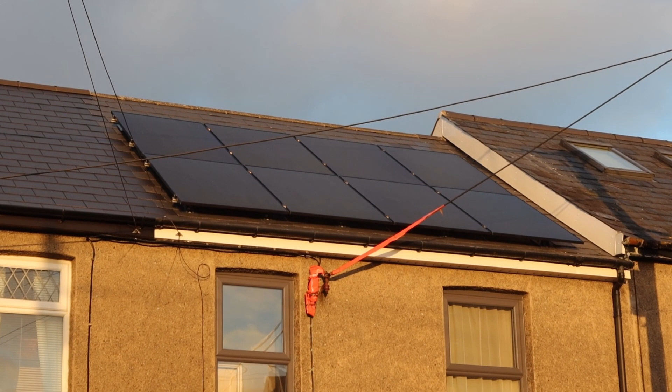So, just thought I'd give you an update on my solar. So this is the outside of my house, of course. I'll zoom in on the panels if I can. How do we do this? There we are. Don't know if you can see there. That's 2, 4, 6, that's 8 panels.

So that's giving you, I'll have to work out what kilowatt hours. I think it's about 3 to 4 kilowatts, something like that. But there we are, there's the panels, soaking up the last rays of the sun for the day. What are we today? 30th of January. So I'll show you in a bit the inverter and the battery. Bye for now.

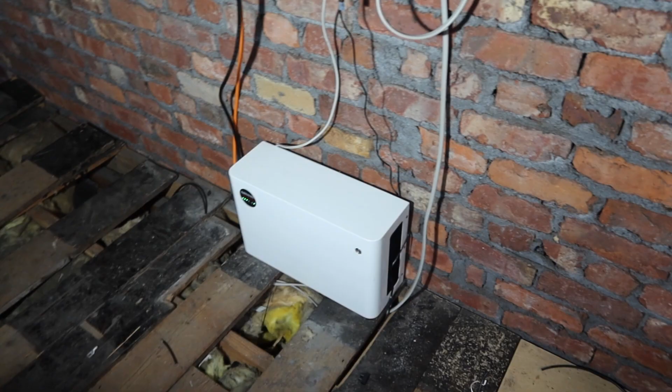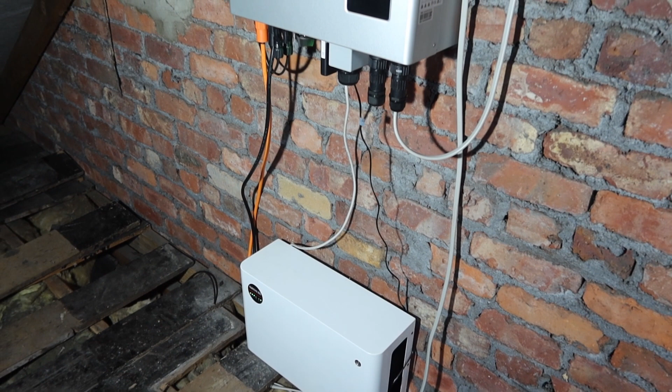So you find us up in the loft. I'm slightly diverting off my room refurb for the time being, just waiting for the plasterer to come. So I thought I'd just explain my solar system as best I know it anyway.

Now then, so here we have a battery, lithium battery, and it's rated at 3.2 kilowatts, and that matches the panels, which are 8 panels, 400 each, which adds up to 3.2. 4 8s are 32, of course.

So it's 8 monocrystalline black panels. Allegedly, the black makes them more efficient in low light levels, according to the blurb. See no reason to doubt their wisdom on that. I'm sure they've tested it. Anyway, so as I say, 8 400 watt panels amounting to 3.2 kilowatts, 3.2 kilowatt storage battery, and the inverter.

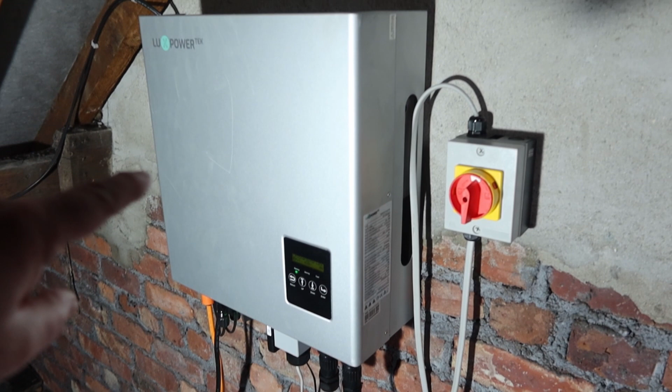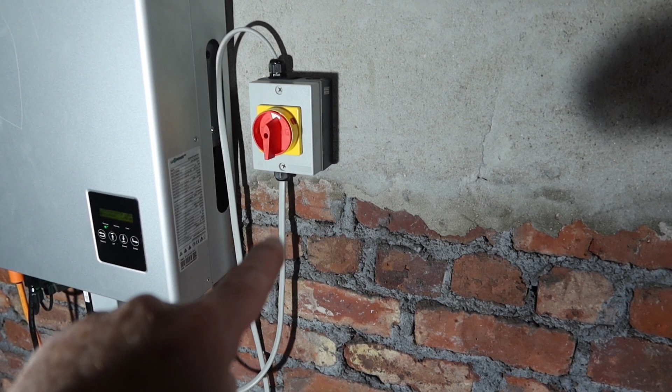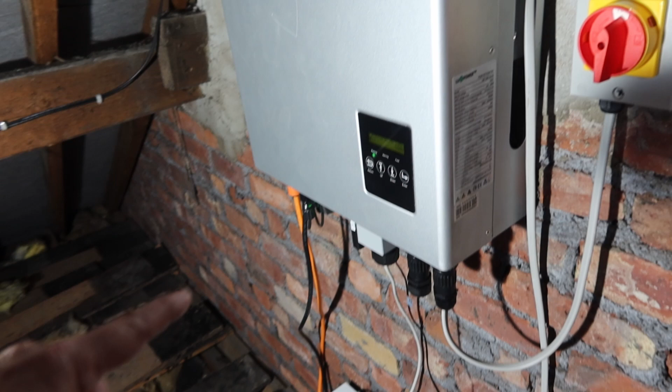I don't know how well that comes out. Well, that's basically it. That's all the wiring that's into it. This is obviously the wire going down into the mains downstairs. These then connect up to the battery and the solar panels, and if you can see it, I'll go around the corner, that'll be the isolator switch for the solar panels, I would imagine.

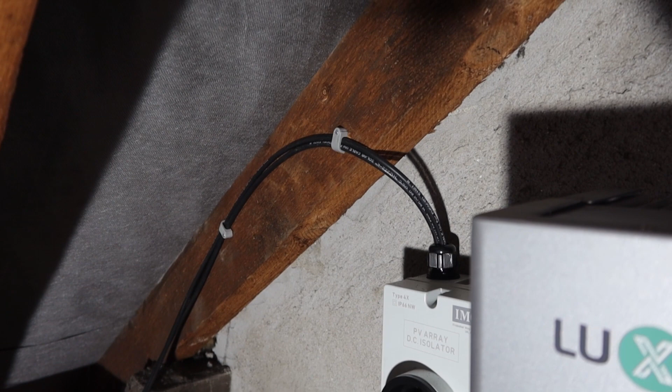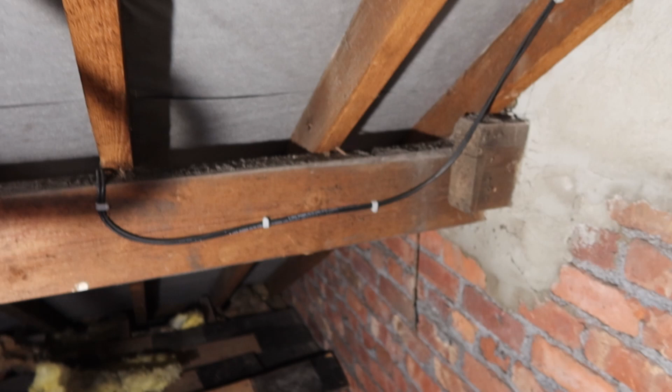What's that, 2 cables coming in? Yeah, 2 cables. So that's obviously 1 cable to each set of 4 panels, I would imagine. So not overly complicated with the amount of cables, etc. The battery is obviously very heavy, and to get it up here, I'm glad I wasn't doing it, that's all I can say. And I think probably the inverter is quite chunky as well.

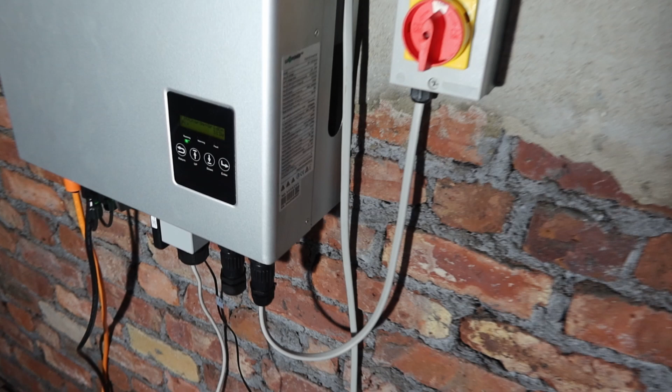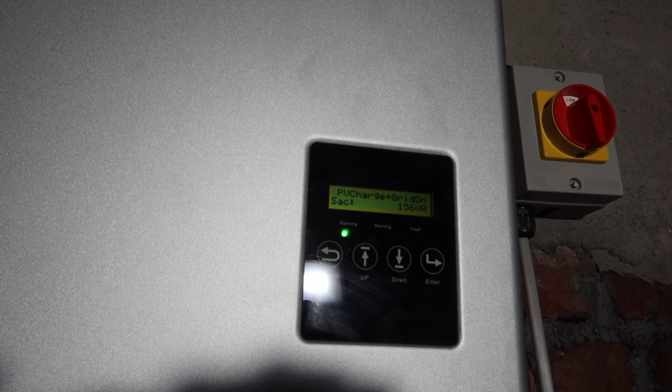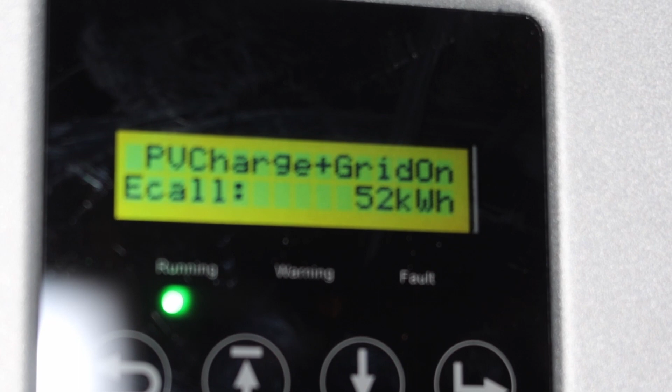So does it give me any information? I don't know. Let me get on the other side of it. Let's have a look here. It's difficult to bend down. So obviously this is the battery charging up, and then what is this display telling me? Bear with me. Right, is this going to focus? Come on, focus. I have no idea what all that means. I'll show you my app on my phone shortly. Anyway, so that's the system.

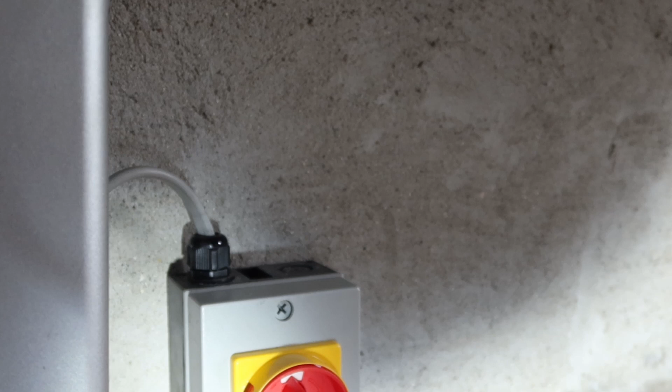And I'm not going to show you the rest of my loft, as it's very scruffy and dirty. I don't know if you can see me from there. Oh, hang on. So, woohoo! Bela Lugosi the ghost.

So that's the system in my loft. Not much more I can say about that, really. I think earlier on you'll have seen the panels on the roof. So I'm going to stop filming shortly so I can show you the app on my phone, which gives me hour by hour running of the system. And yeah, that's about it.

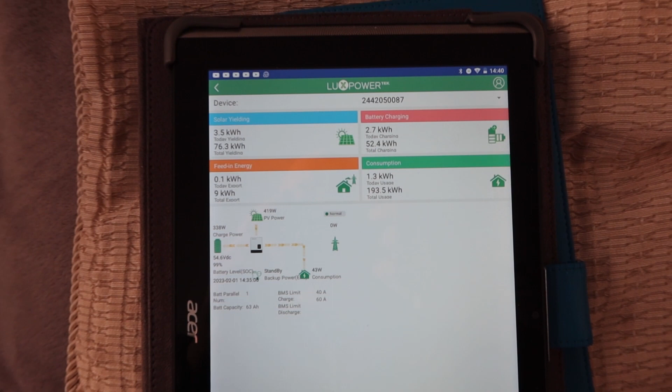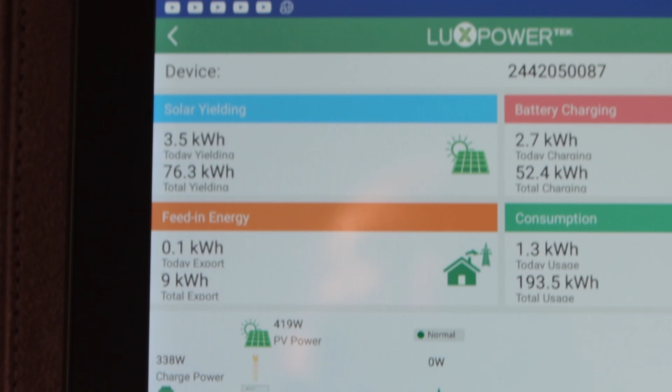Now then, let's see. Now this is on my tablet, not my phone, because the display's a bit larger. Right, let's see what we can sort out here. So I think it's pretty self-explanatory. Come on, focus. Total yield today. We're starting at the top left on the blue. Solar yielding is 3.5 today.

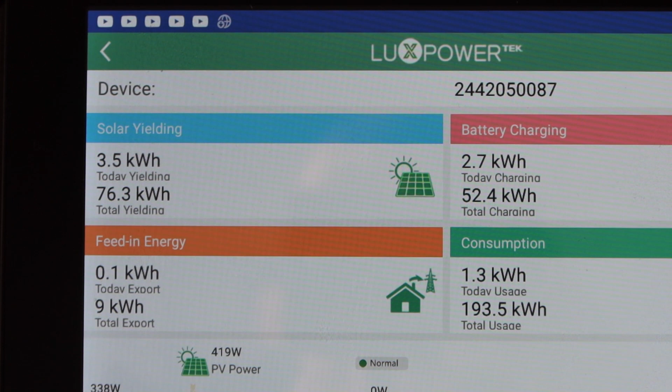Feed-in energy, today's 0.1 of a kilowatt, but total is 9 kilowatts I fed into the grid, which I'm annoyed with because I don't want to feed into the grid, thank you very much. I want it all in my battery. Top right then, today charging is 2.7 kilowatts. Total is 52.4 kilowatts.

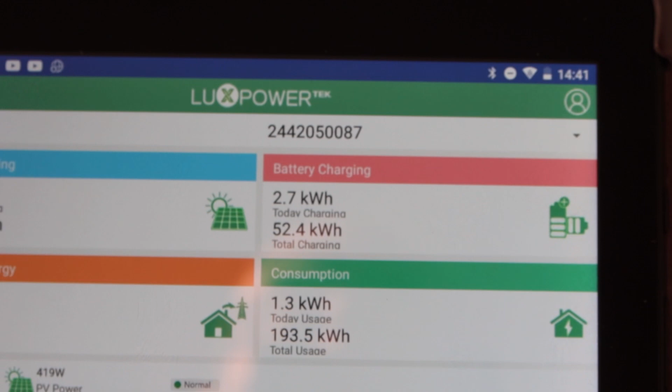Consumption then is 1.3 today so far, and what's the time now? 10 to quarter 3. Total use 193.5 kilowatts so far since it was put in. And then this other display here is showing what's happening. So it's pulling in 419 watts from the solar.

Excuse me, I don't know how well you can see this. Okay, I don't know if you can see that. So we're pulling in 419 watts from this PV, photovoltaics of course. 338 are going into the battery, which is almost 99% now.

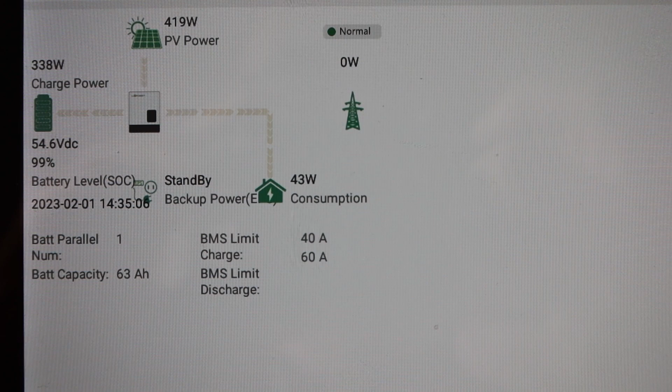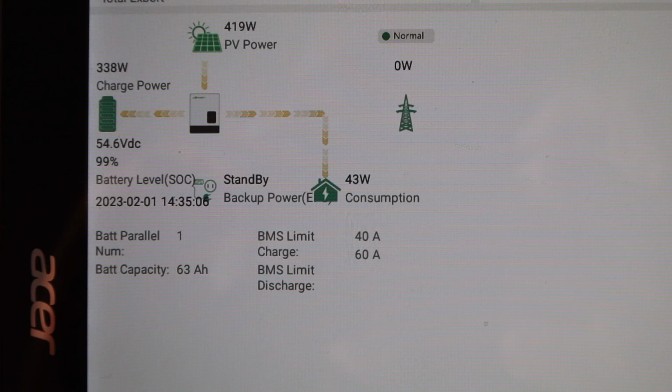What else we got coming in? And then consumption is 43 watts. Now that's probably things like the fridge, the freezer, and what else is on? I'm trying to think what else is switched on at the moment. Well, there's only the power to the internet, but not a great deal. So there we are. And then obviously you can see the grid icon here. There. Now then,

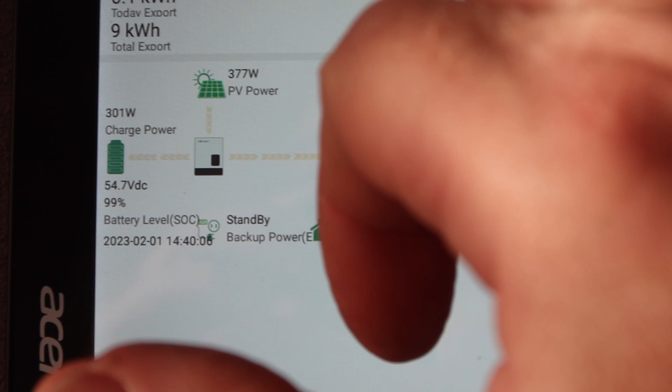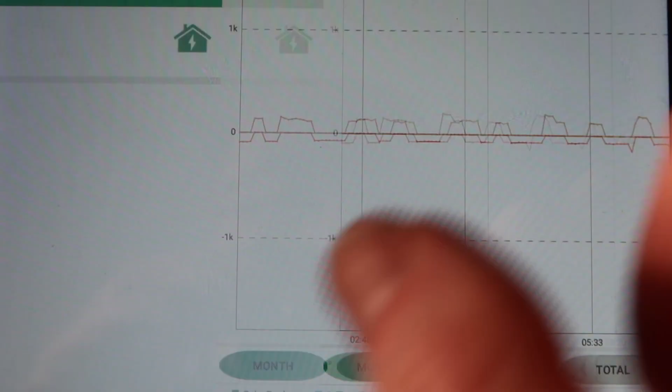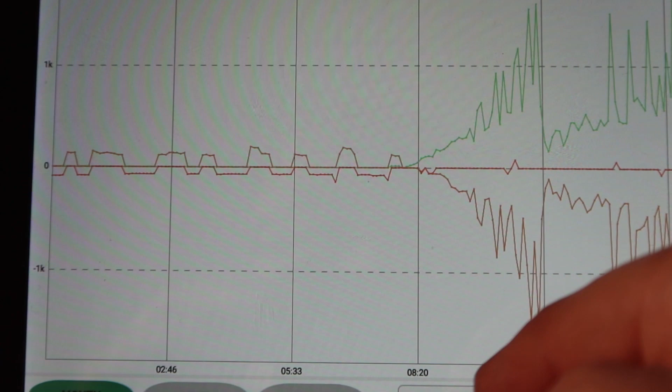then on this we have a historical chart. Now sorry, let's go back. This display here is not real time. There's a delay, usually half an hour or so. So obviously if it was sunny earlier and it's cloudy now, then it's not a second by second reading, but this gives you the trend. So that's my solar on the top. I've got to be honest, I'm not fully conversant with this app yet.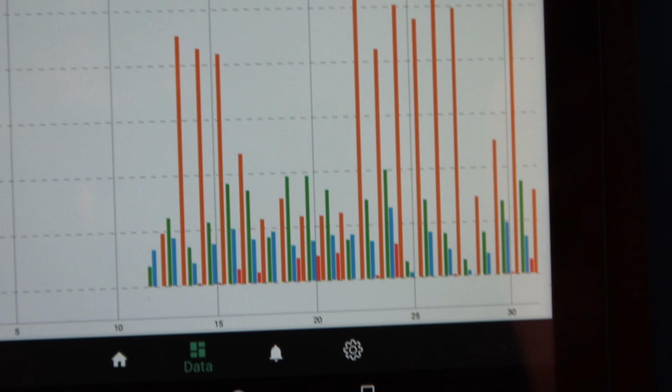And then down the bottom we have the various, oh right, okay, because it's February now, isn't it? I forgot. So if we go back to March, try January. So all these bars going up and down, obviously colour coded, which is difficult for me because I'm colourblind. So that's a darker brown and that's a lighter brown, which is very difficult for me to see. This is why I need a larger scale.

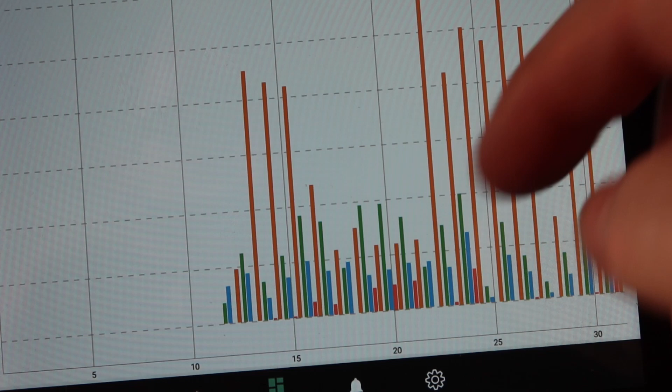So the darker brown is export to the grid, which is probably, is it dark brown or red? I can't tell, it could be these at the bottom, probably. Why has that gone black? That's weird. Anyway, consumption then is these big long brown ones, obviously. The blue is battery, coming out of the battery, I don't know. And then green is solar production.

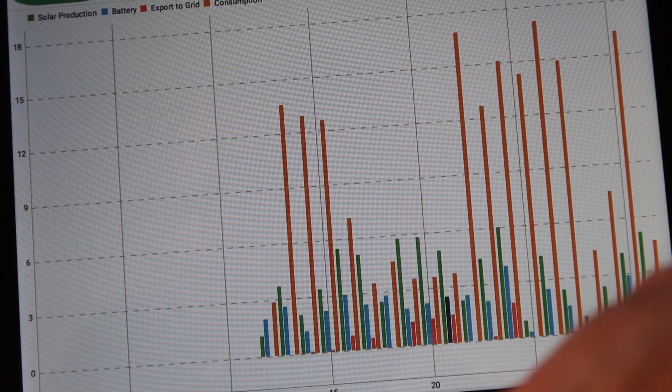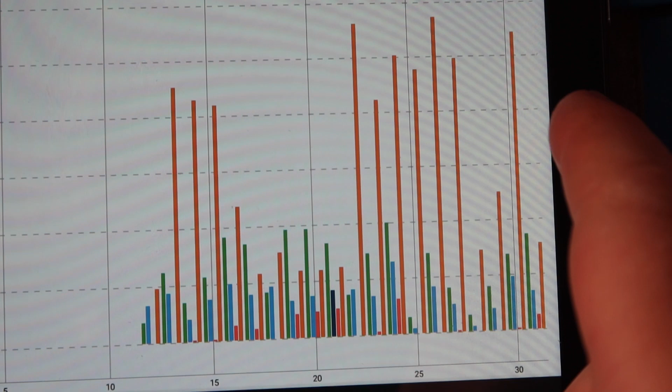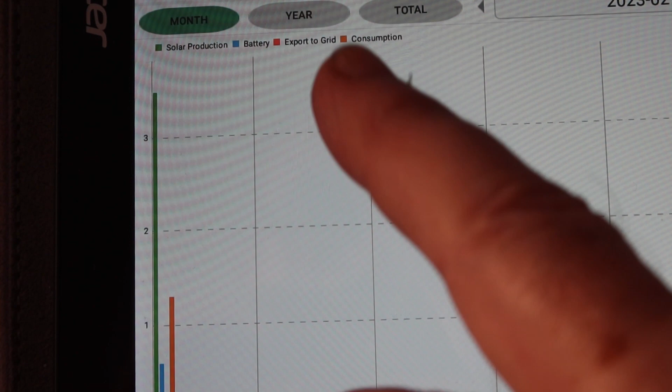So you can see, again, I'm not quite sure. These are the dates along here, as far as I can work out. What this relates to, I have no idea, unless it's kilowatts. Possibly. Anyway, so that was for January. Now we're into February. So again, the green is solar production, so it's way off the chart there. That's over 3 kilowatts, crikey. Blue then is battery, the bottom one is export to grid, which is virtually nothing, and the next one is consumption, just over 1 kilowatt. But there we are.

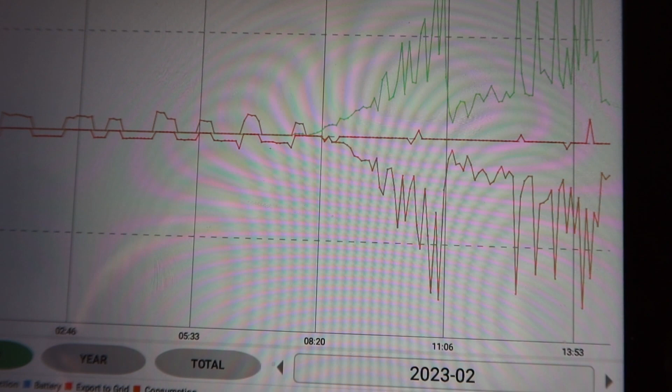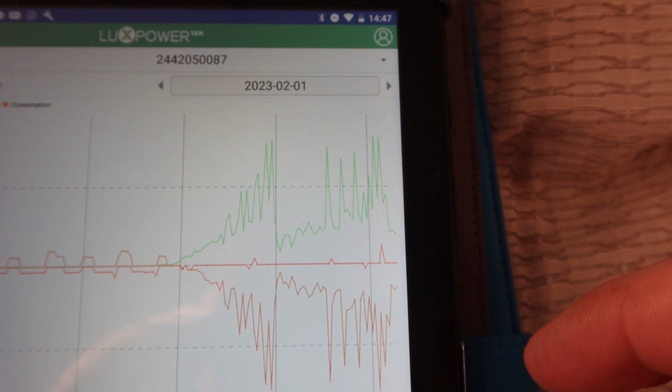And this is how the solar is performing over time. So we got, oh gosh, I'm trying to kneel down and do this, it's awkward. Is that going to work? Maybe not. I'll do it manually. So we had a peak at around about 11:06. It dropped right off because the clouds came over, and then 13:53 went back up again. So 13:53 was the last time, so that makes it about an hour behind, but that's okay.